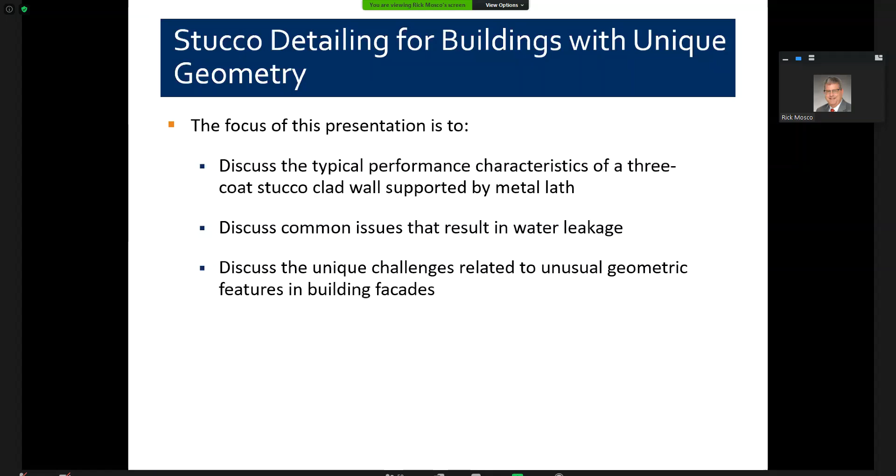And what we're going to be doing today is we're going to start with a focus on discussing typical performance characteristics of three-coat stucco-clad wall systems. We're going to talk about some of the common issues that result in water leakage, and Michelle's going to take you through most of that. And then in the end, I'm going to jump back in and talk a little bit about how unusual geometric features can affect the way a building performs from a water-resistant perspective. In the end, our goal is to provide you with an understanding of how these unusual geometric features can affect the behavior of water in the stucco system. And we want to be able to assist designers, builders, anyone who's involved in the construction, how to avoid these potential water intrusion problems due to inappropriate detailing.

So I'm going to turn this over to Michelle, and if you want to take over the screen here. Okay.

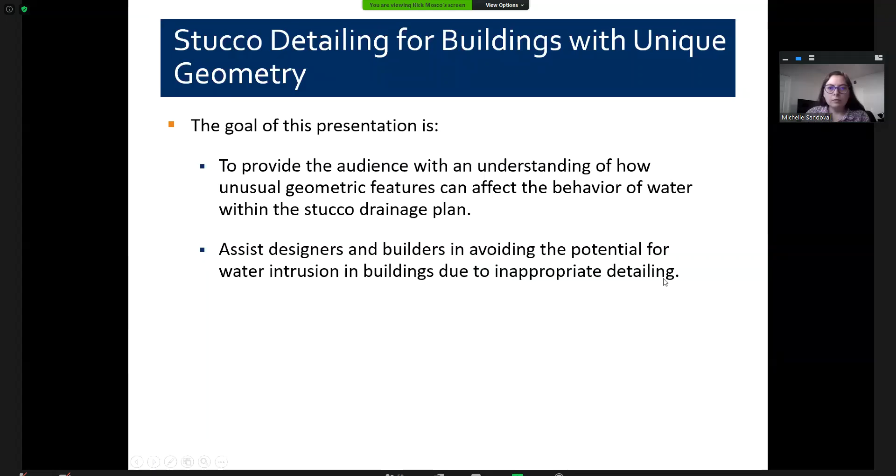So as Rick said, I just wanted to start off with a little bit of a precursor, brushing up on some stucco basics, talking about the different types of stucco cladding, such as the barrier system and drainage system.

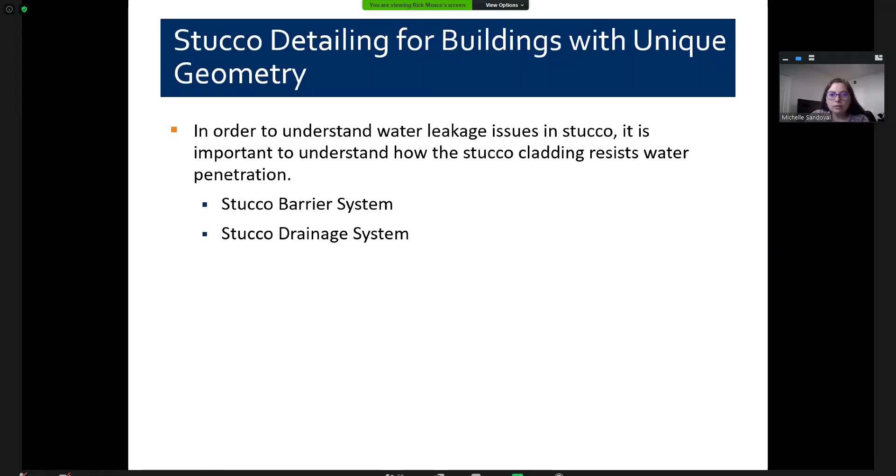So typically we know, so, oops. I don't know. Rick, are you moving slides? No, I'm not touching anything. Oh, okay. There we go.

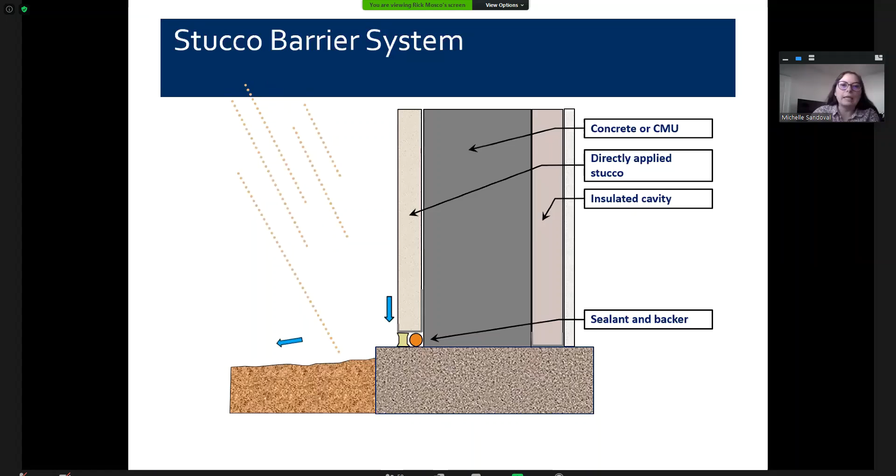Okay, so barrier system. Typically we've got that would be stucco directly applied to a CMU cast-in-place concrete wall. As you can see in the graphic indicated with the blue arrow, water is not penetrating the actual stucco assembly, since there's no actual drainage plane behind the stucco in that particular system. So generally for a directly bonded stucco system, we have either against CMU or concrete. The biggest difference is there's no weather barrier behind the stucco assembly. And it's pretty critical for the stucco to be actually fully bonded to the substrate, since that's what really allows it to perform as a barrier versus a drainage system.

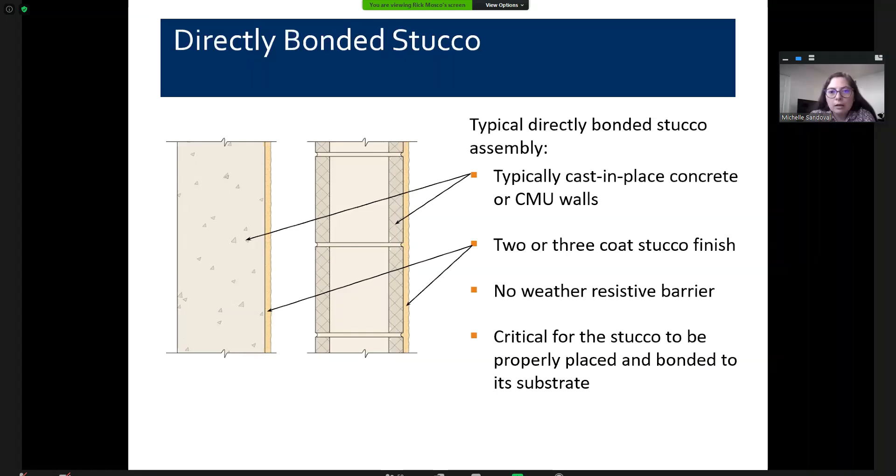And then a more common approach that we see is the drainage system, where we have a drainage plane behind the stucco assembly. This drainage plane will consist of a weather-resistive barrier and flashings, which allow water to evacuate that actual drainage plane. This graphic is just one particular profile that could work for that as far as a drainage medium, but there are different profiles that can work for that.

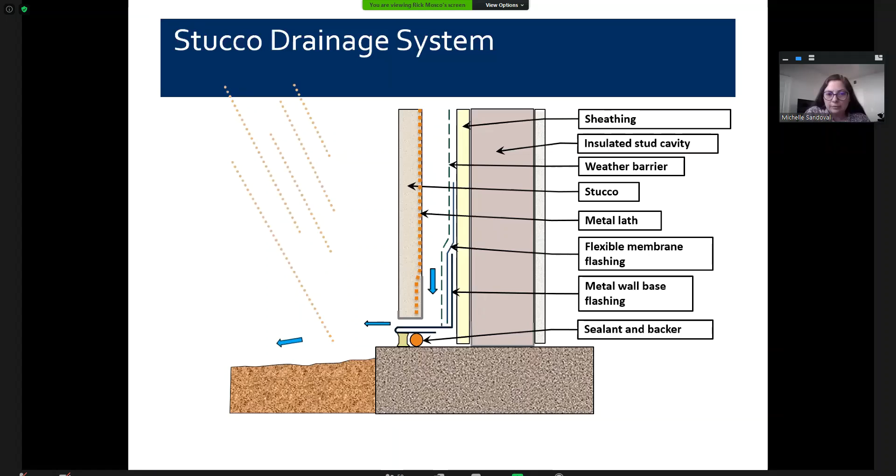As Rick mentioned, we generally know how water behaves when we have a drainage plane in stucco, and it's generally predictable what path it will take. This changes with buildings with unique geometry.

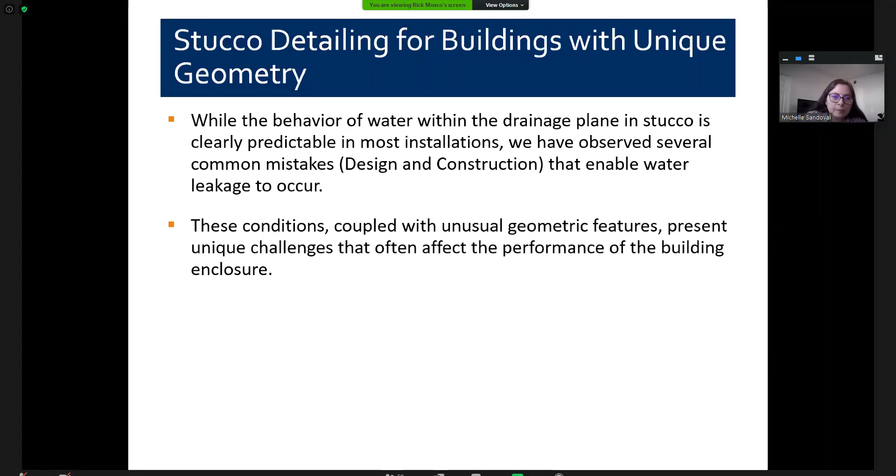Although water management can be generally predictable, we often see some common mistakes either in design and construction that do lead to water leakage. These, as Rick will get into later, can be further intensified with buildings with unique geometry.

So just a little bit of a precursor, a brush up on typical stucco components. Generally we either have 1, 2, or 3 coat stucco, ranging between 3/8 to 7/8 inch thickness. Most typical, we have a 3 coat stucco with 7/8 inch thick over a metal lath.

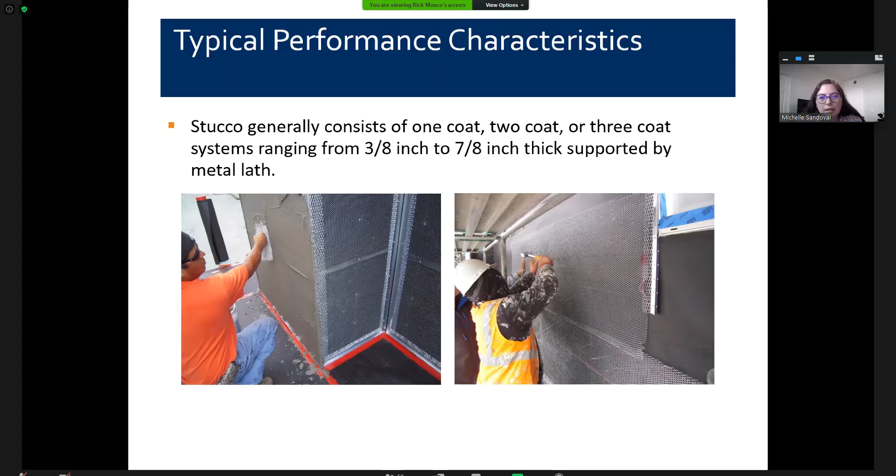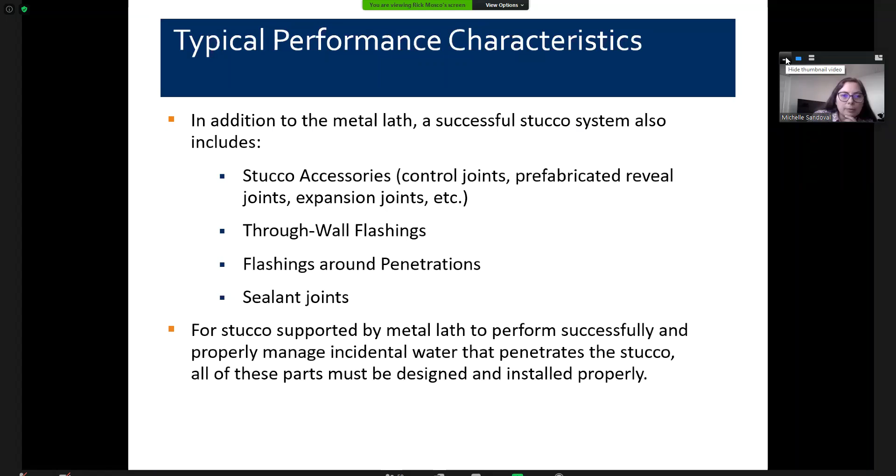In addition to a lath, there are also several other accessories for stucco, such as control joints, reveals, expansion joints, through-wall flashings, and other penetration flashings. We also have sealant joints that go around the perimeter. But in order for the stucco to really perform properly, all these components need to work together to actually have a proper water management system.

Unfortunately, all of these parts are not always properly designed or installed. From our past leakage investigations, we often see common issues with either poor installation of the weather barriers, failure to provide or install through-wall flashings properly, poor installation of metal lath and different accessories, as well as application of the stucco in a horizontal application.

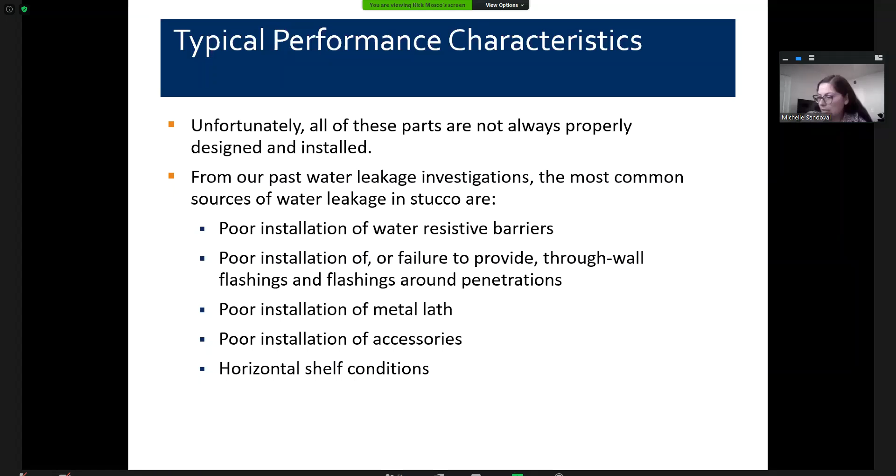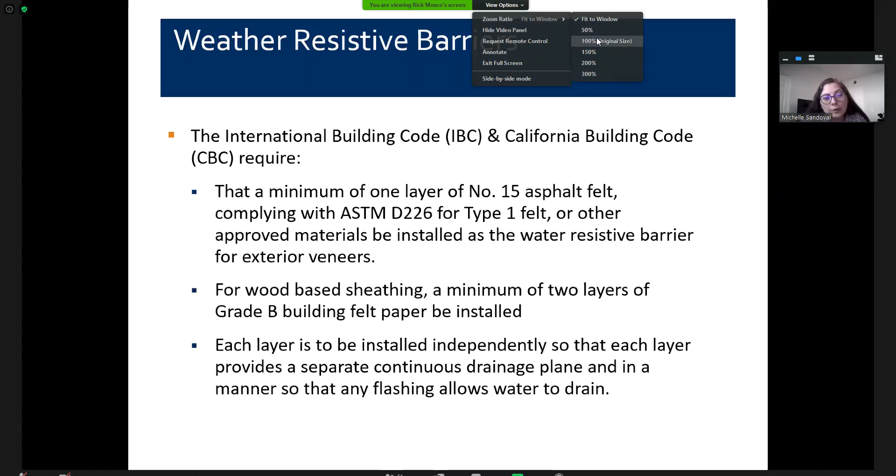So getting into a little bit of information from what the code actually requires. IBC and CBC both require just a minimum of 1 layer of number 15 asphalt felt for complying as the weather barrier. For wood-based sheathing, 2 layers are required, and each layer needs to be independently installed to allow for a drainage plane within each layer.

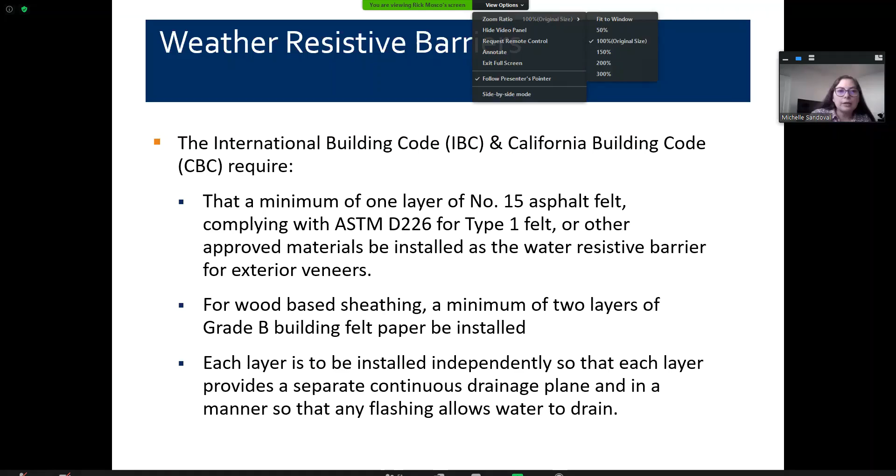As far as different types of weather barriers, there are definitely quite a wide range. There's loose laid sheets, self-adhered sheets. Loose laid can be felt, paper, building wraps, different types of actual sheet products. Then we have fluid applied membranes and adhered membranes.

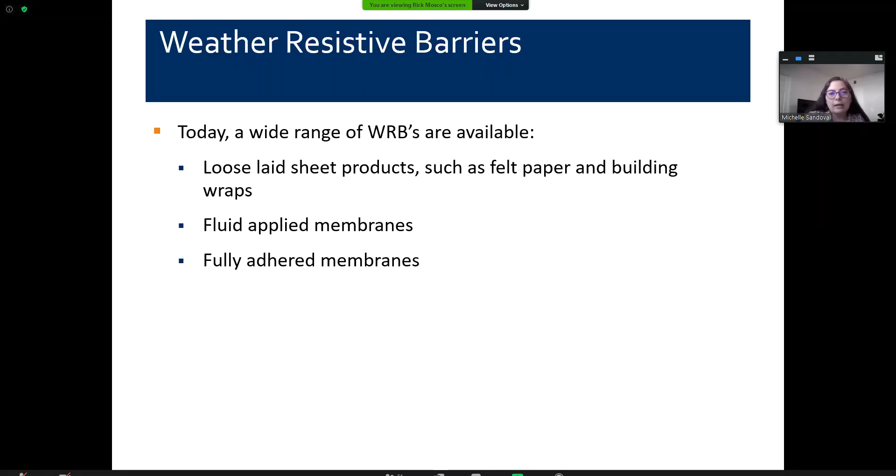From our experience, usually 1 layer of building paper is generally not adequate, particularly if there's compounding issues at flashing conditions that can allow that 1 layer to fully saturate, and then in turn saturate any sheathing or even framing behind that particular weather barrier.

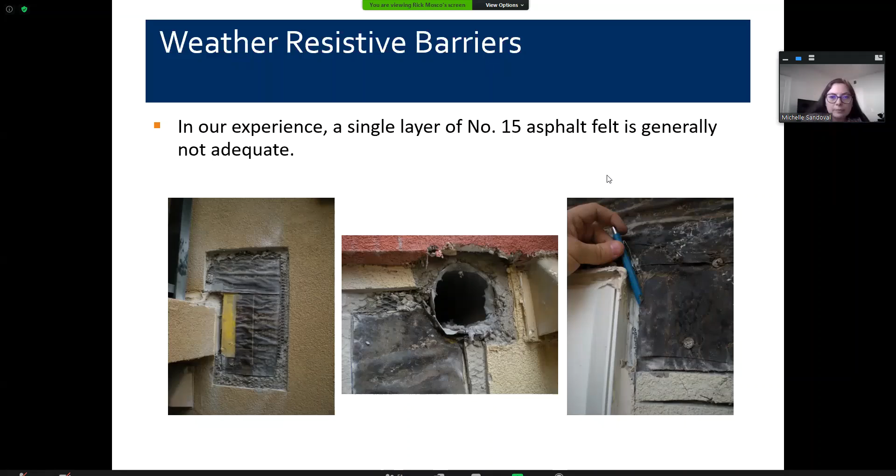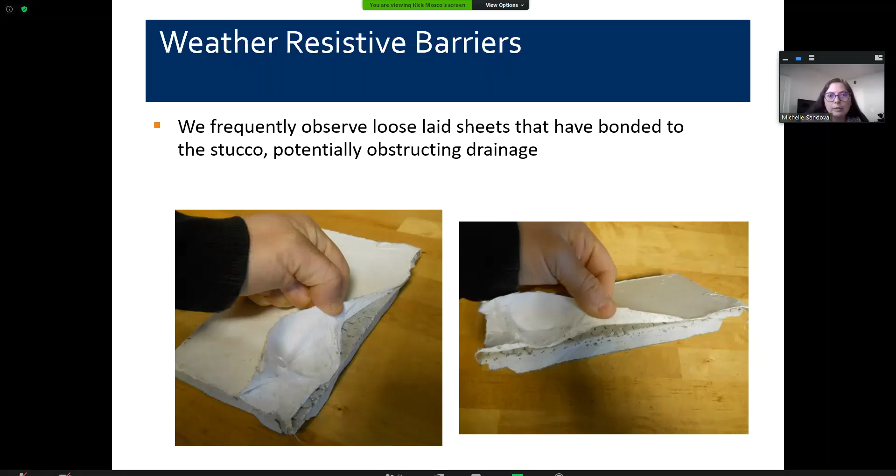We also have often seen some of the loose laid sheets that can bond to stucco if there is no sacrificial layer of building paper that might be used as a slip sheet between the loose laid sheet.

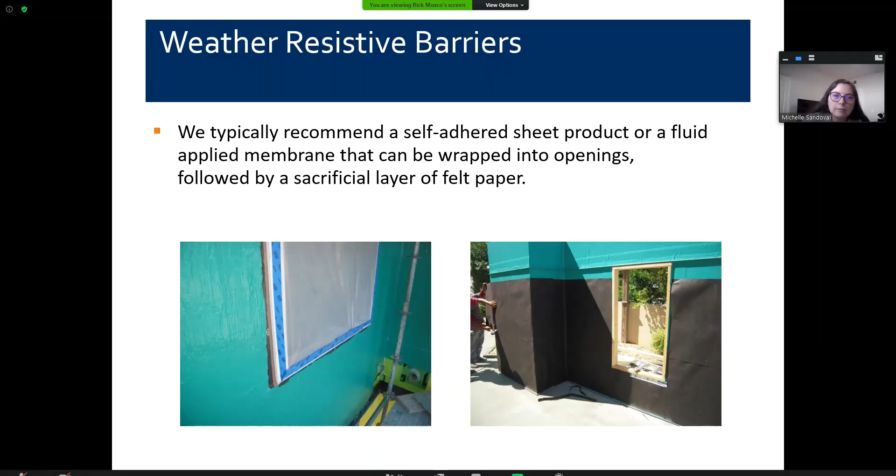So generally, we typically would recommend either a fluid applied or self-adhered sheet product that can be wrapped into openings, followed by essentially a sacrificial layer of building paper that can act as a slip sheet between the backside of the stucco and the fluid or self-adhered membrane.

So for flashings, again, IBC and CBC have similar requirements as far as the purpose of the flashing to allow for water to evacuate the drainage system. And essentially it also requires flashings around typical transitions such as different deck conditions and window assemblies.

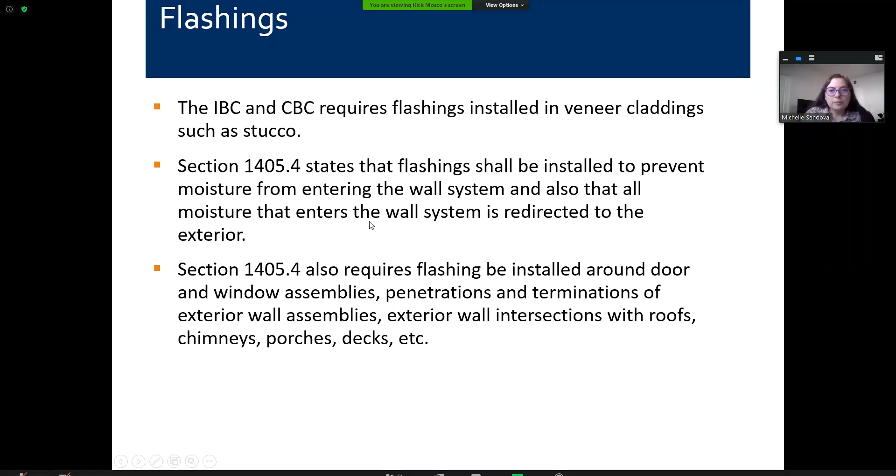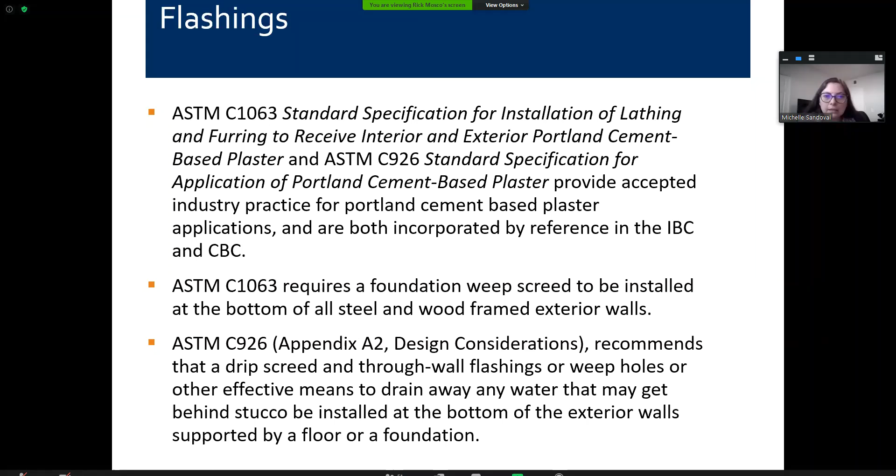As far as other standards that are pretty common industry practice for following stucco application, we have ASTM C1063 and ASTM C926, which both help with specifying standard practice for application of the lath and the plaster. ASTM C1063 has more specific language on what kind of flashing would be recommended for the base of the wall, as well as different through-wall flashing requirements that essentially help with the management of water and evacuate it from behind the drainage plane to the exterior.

I think there's a delay.

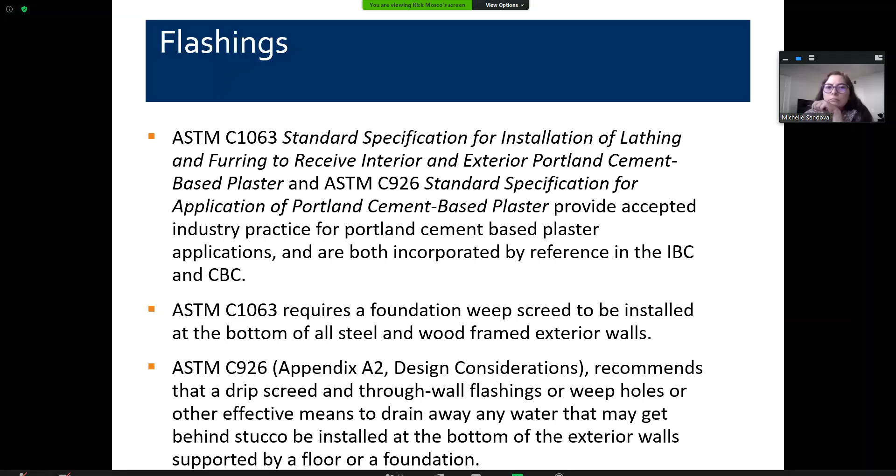Okay, so although we have language and standards and different code requirements for how these different flashing conditions should be either installed or incorporated with the stucco system, they're frequently either possibly detailed incorrectly or installed incorrectly, and oftentimes these flashings are just not incorporated in either the correct locations or in the correct sequencing.

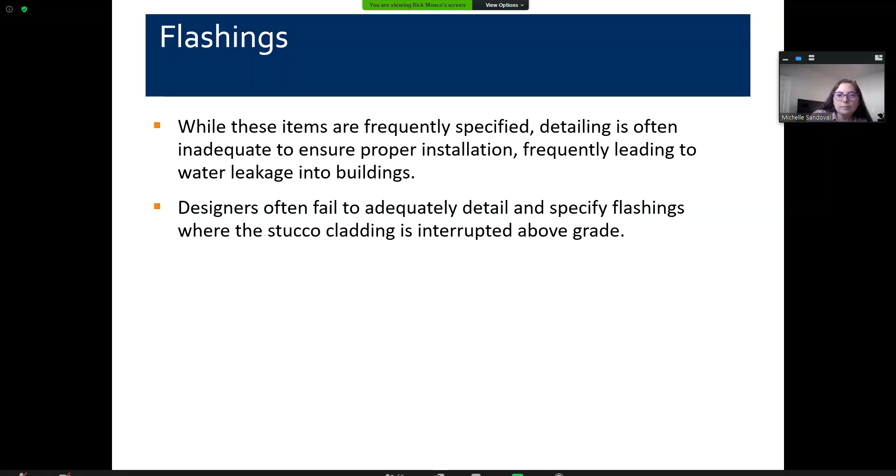Through our various investigations, we have seen the most common examples of issues are at areas at balcony transitions, window heads, and different penetrations such as pipes.

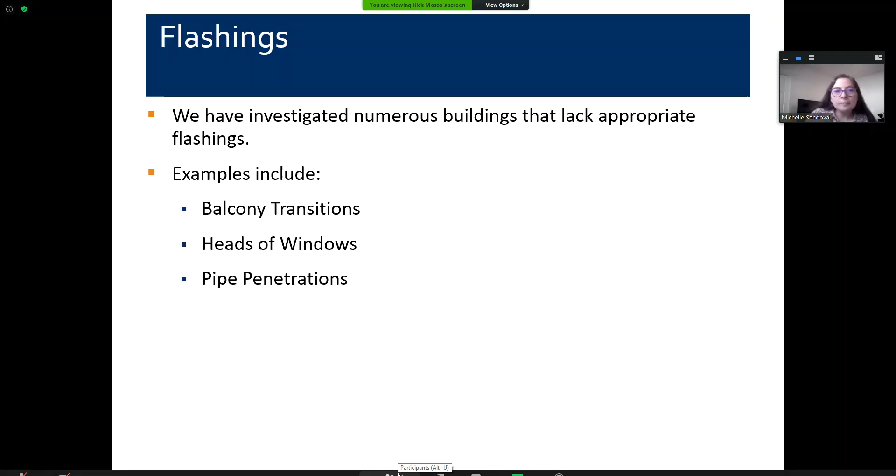Here we can see a typical balcony transition where no saddle flashing or other form of base of wall flashing was incorporated, which led to water being trapped in this area and saturating the building paper behind.

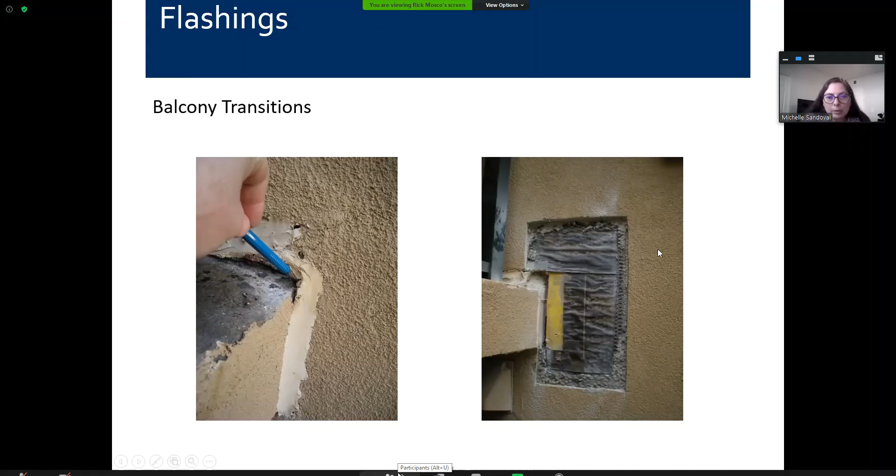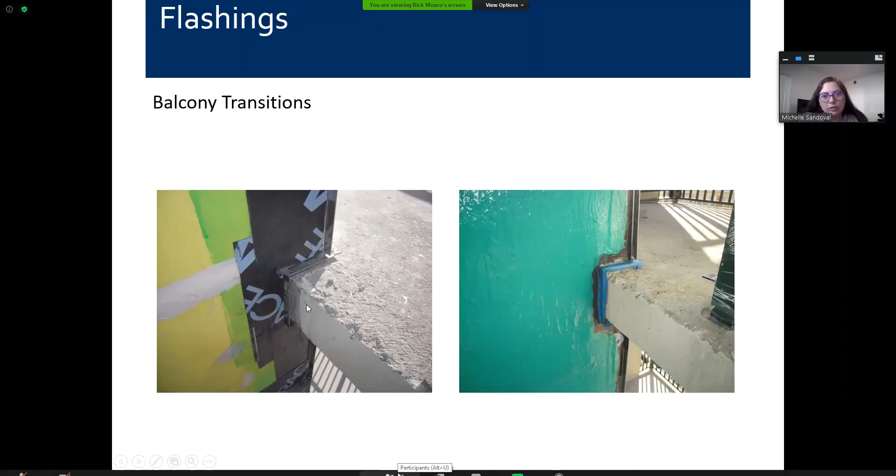A more appropriate detail for this type of condition would be including a saddle flashing that wraps around that edge and a self-adhered membrane that transitions with that flashing, as well as a weep screed and different casings that would finish the transition at that balcony edge and actually allow water to drain around that edge condition.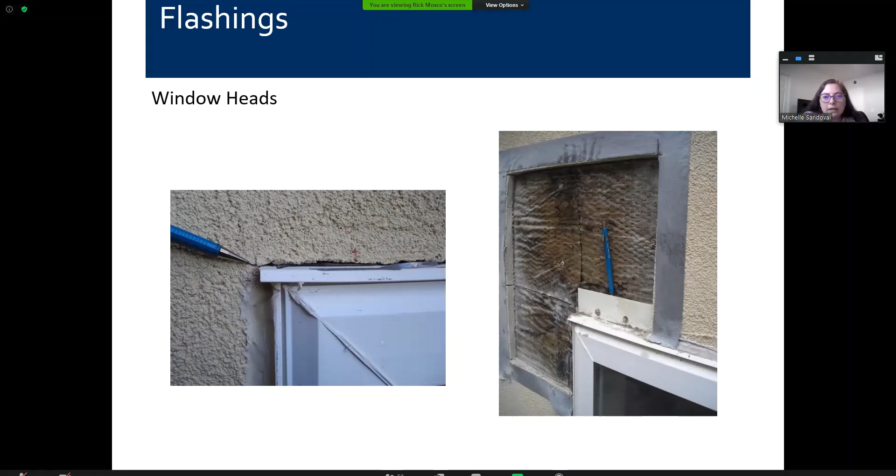This is just another similar condition where due to lack of any proper transition, water can get trapped, and once that happens, like we said, one layer of building paper is oftentimes not sufficient, and once that's saturated, it leads to water leakage to the interior.

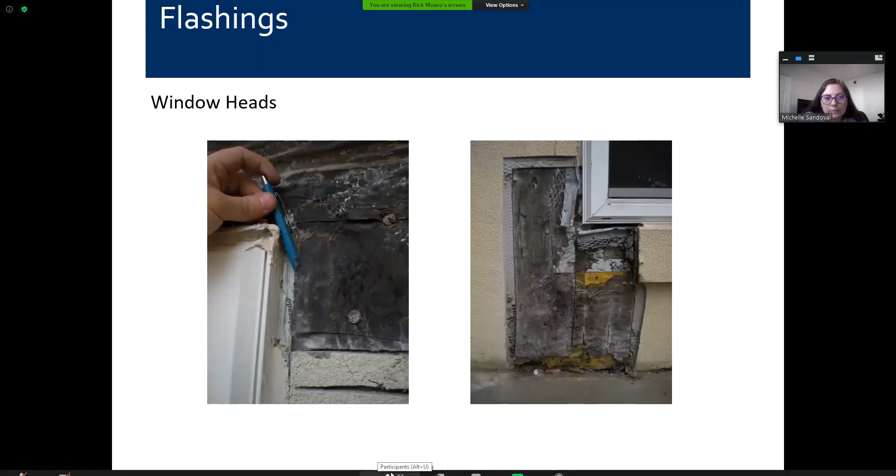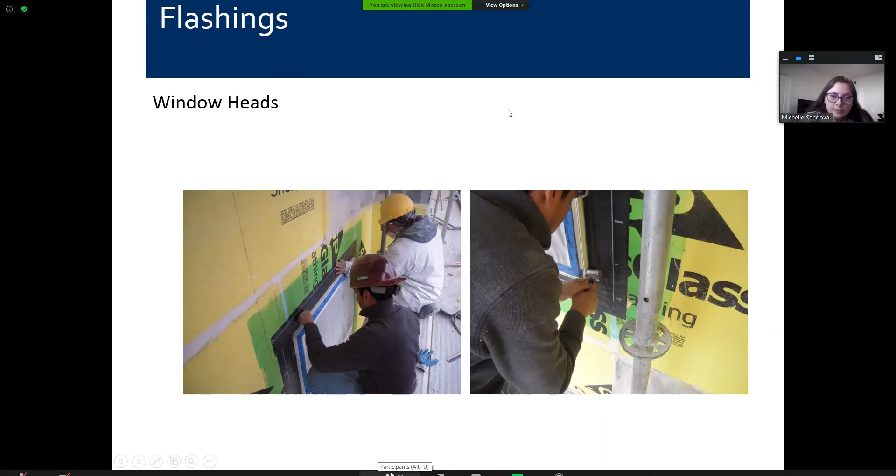Options for better detailing of those types of transitions include having a self-adhered membrane as part of the termination of that sheet metal window head drip flashing. This similar detailing could also be done for through-wall flashings at floor lines and different horizontal joint conditions.

Here as well, you have the window head flashing extending past the window head, which allows for evacuation of the vertical stucco assembly above that as well.

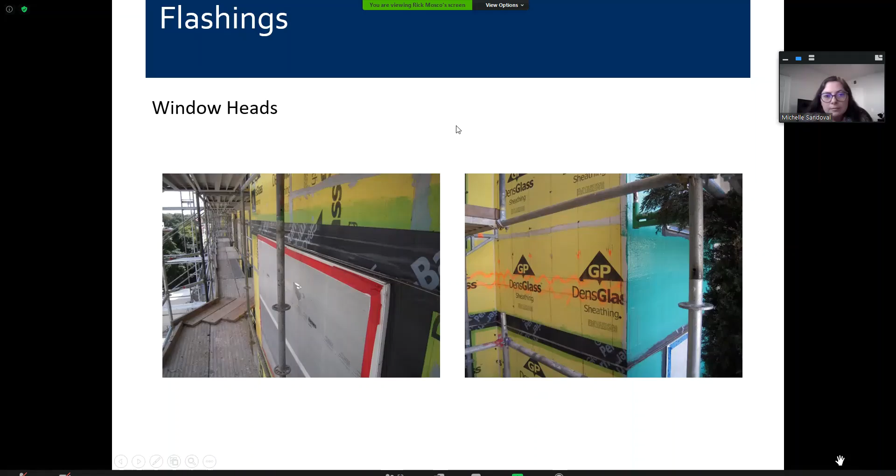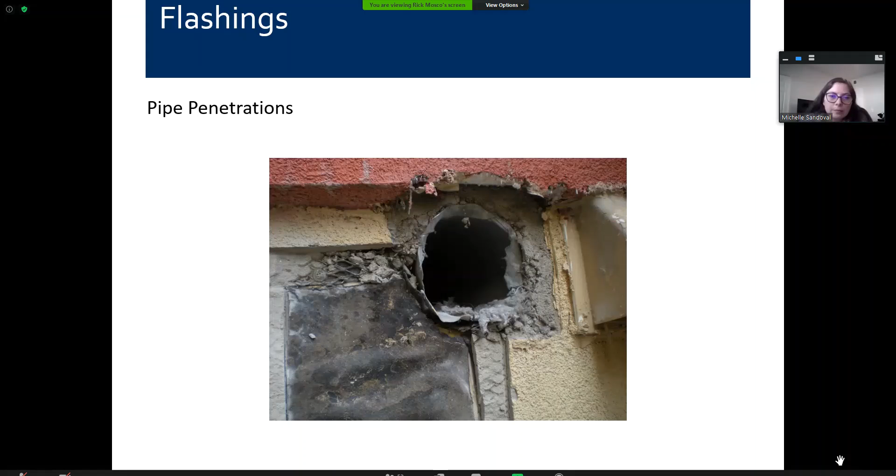Pipe penetrations are also often either not flashed properly, or possibly the gap between the pipe penetration and the cladding surround might rely on just an exterior sealant joint, which oftentimes will deteriorate over time and not perform.

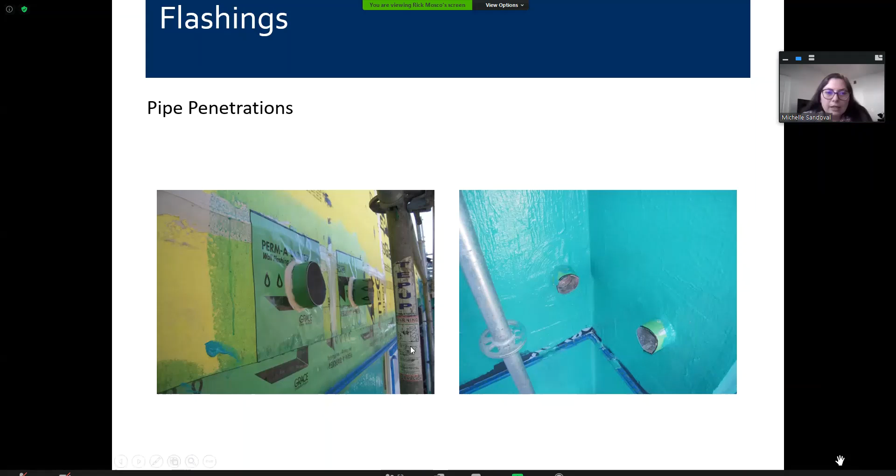A better approach to that type of detailing would be to include a self-adhered membrane around a target flashing around the actual pipe penetration, with a full fillet bead of sealant around the pipe penetration, which then gets integrated with a fluid-applied weather barrier for a pretty robust indication of full flashing around that pipe, eliminating any potential gaps that might occur from the pipe perimeter.

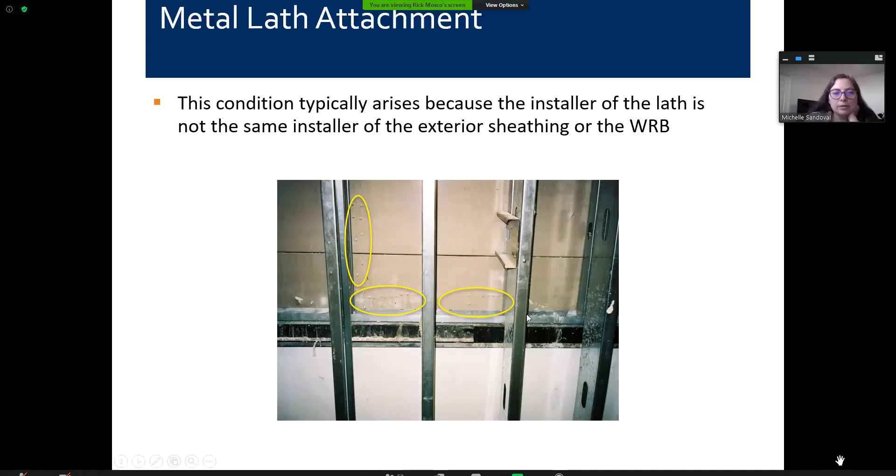Oftentimes we see another possible source for water leakage through fasteners for lath attachment. Although lath attachment is generally supposed to go into the framing members, we have found some instances where shiners, or fasteners that don't actually penetrate into framing members, are observed throughout the height of a whole stud, which can then lead to multiple unsealed penetrations through the weather barrier.

This could be avoided by having some form of coordination between the different subcontractors. Generally, whoever's installing the sheathing or the cladding may not be the same sub. Therefore, in order to have a way to document and mark out where the framing is located, any attachment is actually done back onto framing and not in the field of the membrane.

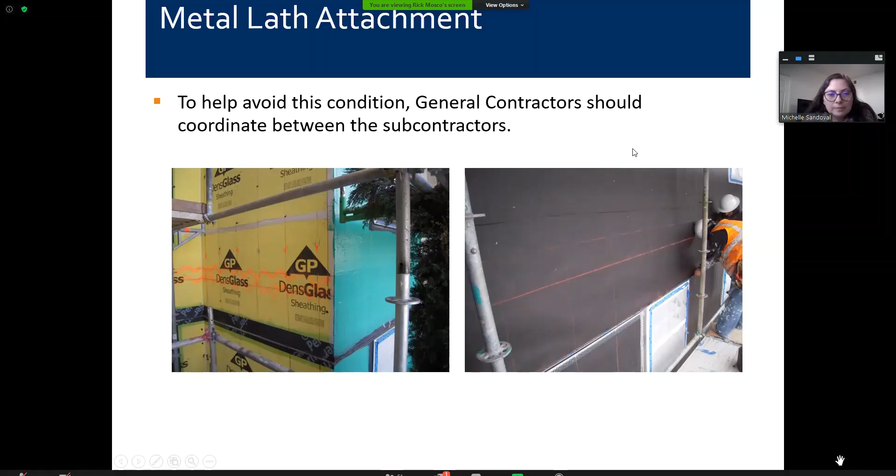So you can see here the lath following the red marked lines of where the framing is actually included, which avoids any kind of loose fasteners that might be offset from the actual framing.

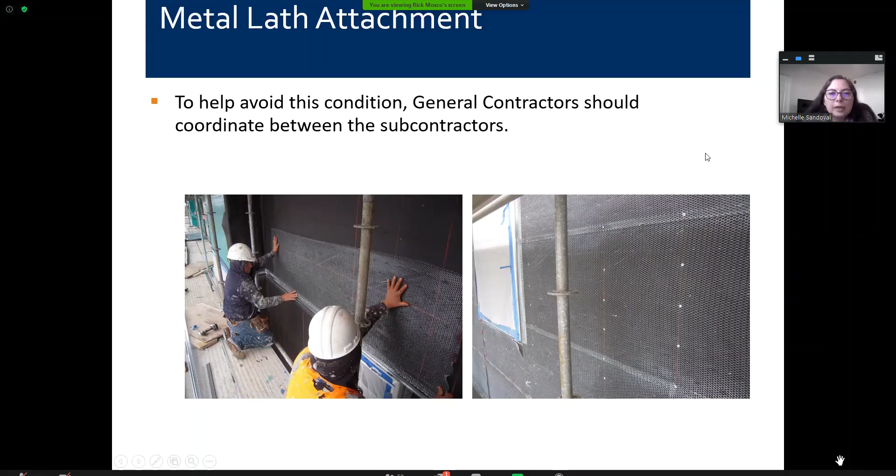Different accessories, most common are metal accessories, but we also see vinyl accessories as well. One of the most common accessories is control joints, which we typically recommend are wire tied, and then we have the screw fasteners for the actual lath.

So here you can see wire ties for a vertical control joint to the lath itself. This allows the control joint to actually move freely and not be restrained back to sheathing if it's screwed on.

Also, you can see here another important condition for control joints is to have the lath be discontinuous between the two sections of the control joint, to allow the two sections to actually move independently.

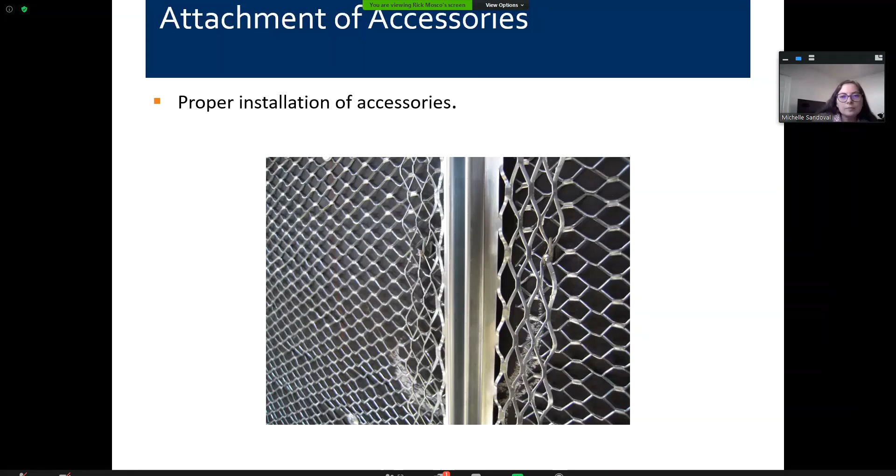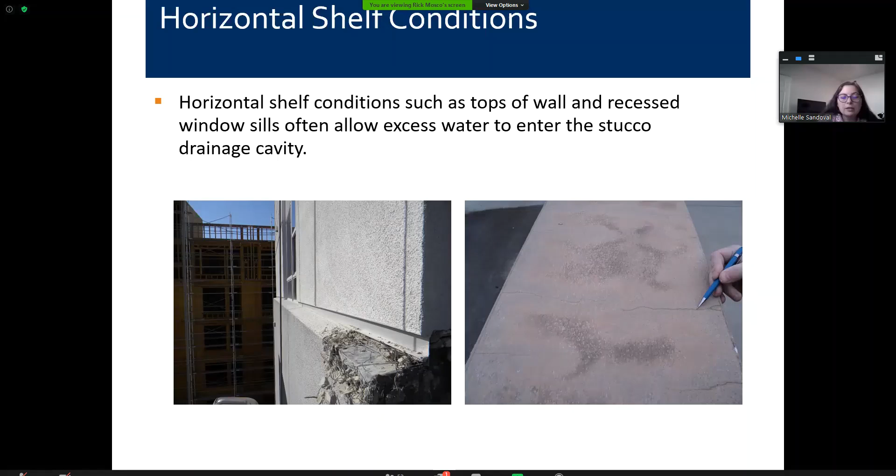One other item that we typically see that might lead to issues is application of stucco on a horizontal surface. We typically see these areas are either not sloped correctly, which can lead to standing water in these areas, and any cracks in these top horizontal surfaces can then lead to excessive water being put into that cavity.

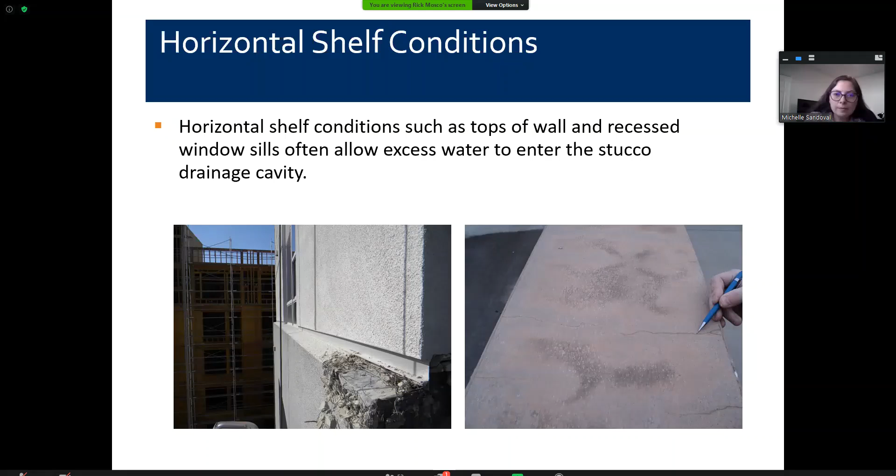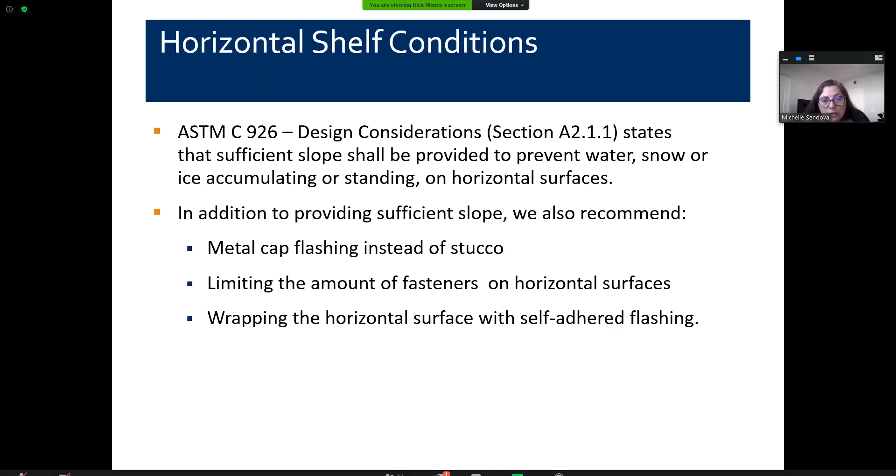Typically for any application of stucco on a horizontal surface, you want to include a sufficient slope. In Southern California, we don't have snow or ice accumulation to worry about, but certain regions might require more slope to allow snow to slope away from that condition. Obviously, if we have any areas with low slope, standing water could be an issue as well. So typically we would recommend either avoiding stucco in that kind of application, using a metal cap flashing instead of stucco, or if stucco is the route that will be used, it's best to limit any kind of fasteners on the horizontal surface, and always wrap a self-adhered membrane beneath the weather barrier for added protection on that horizontal surface.

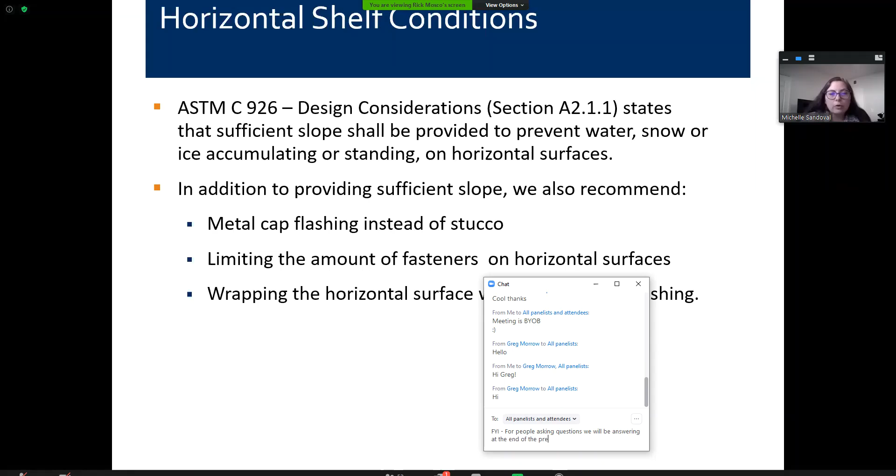And I will turn it over back to Rick.

See if that works. Okay, let's see, get my sharing. There we go, it looks like we got it. Thank you, Michelle, nice job.

Appreciate it. Now we're going to start talking about, I think, what probably interested a lot of you, and that's, first of all, what does it mean to have unique geometry, unusual geometry, and how does that affect the stucco?

So what we've got here is we're going to be talking about things like diagonal control joints, diagonal window heads, diagonal window sills, all kinds of things that are not commonly used in buildings.

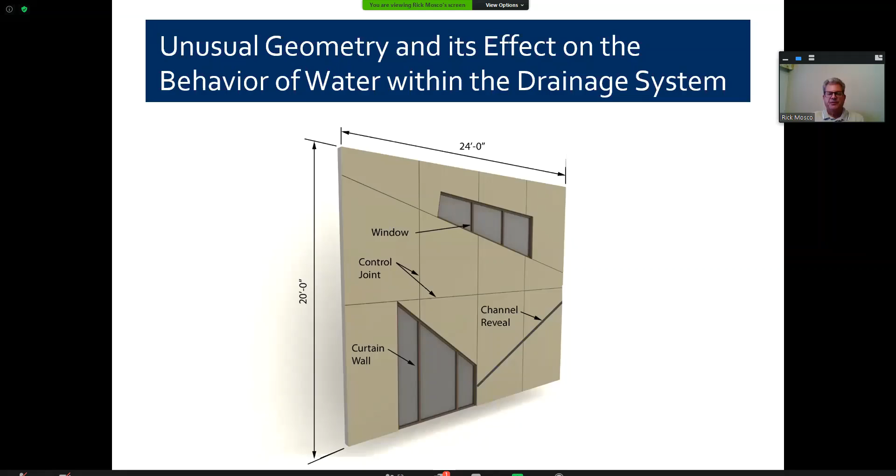The basis of this discussion is it was brought about by a litigation case I was involved in several years ago. We were retained by an attorney who was representing a stucco subcontractor who was being sued for construction defects. By the time I got involved, there had already been a report done by the plaintiff's attorneys and their experts, and pretty much the report said that our client made a lot of mistakes, and we had to agree that there were a lot of construction defects that certainly led to the problems.

But in reviewing it, I concluded that there were additional problems besides the construction defects, and I concluded that the design itself wasn't really appropriate because of the inclusion of these diagonal accessories and diagonal termination conditions.

The system on these buildings is a 3-coat plaster system over metal lath. There was a layer of building paper, one layer of a sheet polyolefin air barrier, and then gypsum sheathing and steel studs.

The water intrusion that we saw in the report that the plaintiffs prepared clearly showed the installation errors. They had done water testing. They had found leaks that replicated leaks that had been going on in the building before the litigation. And when they did the destructive testing, they were able to find these defects. But the report also highlighted a lot of areas that had leaks, but did not have observable defects in the installation. Based on reading that, I concluded that I thought there were some problems with the way the building was designed and how that was going to work with these diagonal accessories.

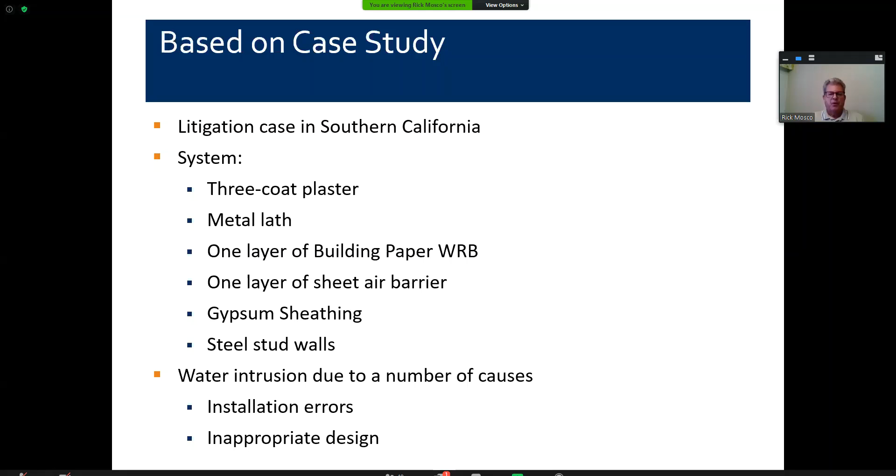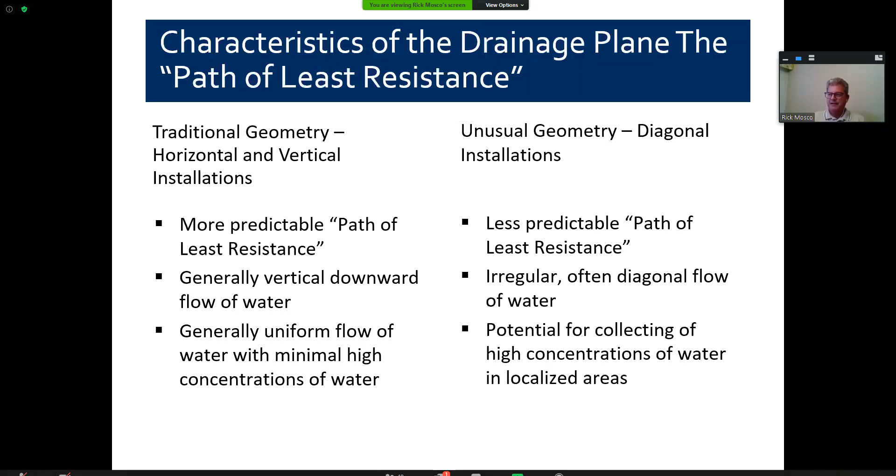So diagonal accessories behave differently than normal accessories. When you have traditional geometry, horizontal and vertical installations, you have a path of least resistance for the water that is more predictable. Generally it moves downward with the flow of water, and it's generally a uniform flow of water. You don't really have a lot of high concentrations of water. With the unique geometry, these diagonal accessories, the path of least resistance to the water is less predictable. It's irregular, it often flows diagonally along with the accessories, and it also leads to a potential for collecting water in high concentrations in localized areas.

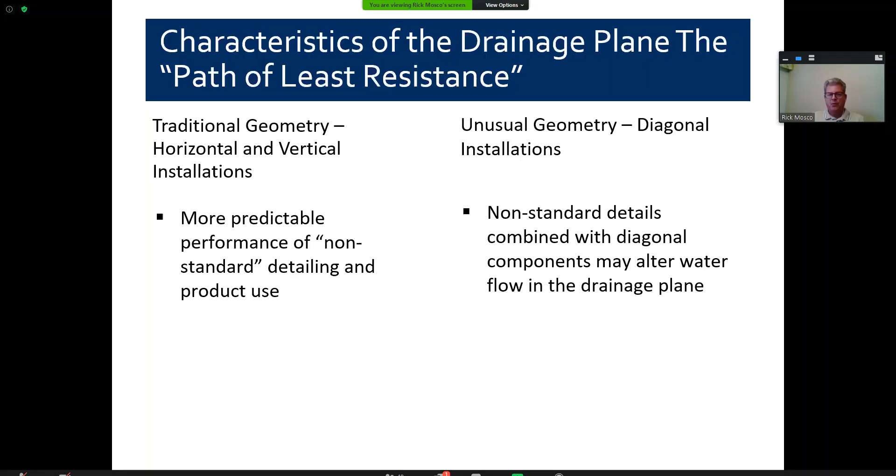The traditional geometry is also more predictable in the performance of non-standard detailing, and we'll talk about what that means in a couple of minutes. With the unusual geometry, the non-standard detailing made things a lot worse. They weren't that great to begin with, but they were made a lot worse. So after we were retained to work on this, and I had this theory that the diagonal accessories and diagonal terminations were contributing to the leaks, we decided to do some testing.

Now, unfortunately, I don't have any pictures to show you of the actual building. I can't show any pictures of the original report or pictures of the building because the owner is a government agency that had, shortly before this litigation, been the subject of several rather scathing reports of construction management problems. So they have never allowed us to have any photographs or access to any of the litigation information. But we were able to do some testing of our own.

One of the mock-ups was as designed. It was built the way the architect designed it, without any of the construction defects that our client had created. The second one was built according to design, but with the same construction defects that we found and that were found by the plaintiffs. Both these mock-ups were constructed.

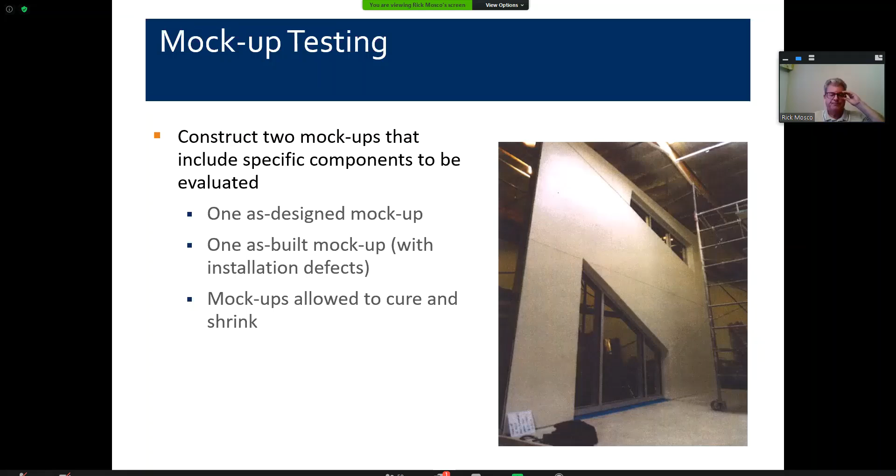The water testing was done in accordance with ASTM E2128, and that testing procedure allows us to use something many of you are probably familiar with: ASTM E1105, also called the spray rack test. So we had the spray rack assembled. Both mock-ups were provided with negative pressure, and we tested the as-built wall and the as-designed wall.

The intent of this was to allow for independent consideration of both construction defects and design issues. So, as expected, the mock-up with the construction defect leaked pretty quickly. We were able to document a lot of the same kind of leaks found in the original investigation. But we also found leaks in the as-designed building, built the way the design called for but without any construction defects, and those leaks occurred in similar locations as we had seen in the report from the original investigation.

The mock-ups also allowed us to evaluate some repair procedures. We wanted to consider whether it should be reclad as originally designed, or if we decided the original design was not adequate and we needed a new design for recladding, and then we wanted to consider the possibility of a barrier coating.

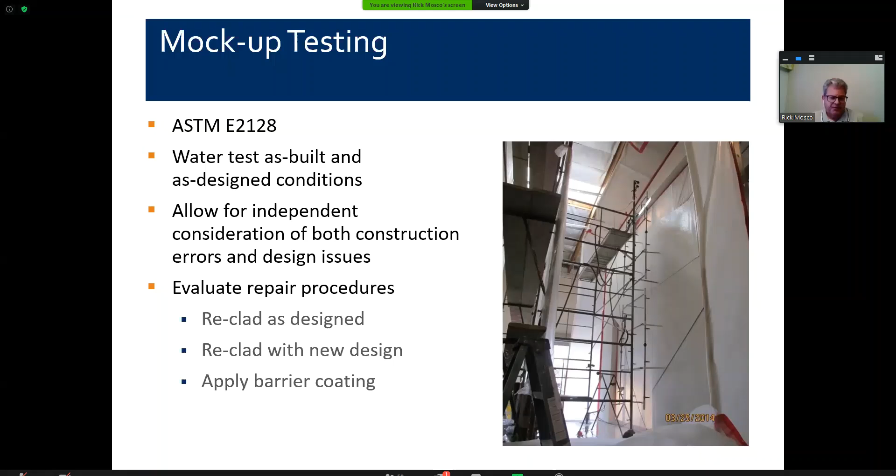So the mock-ups included several features: horizontal and vertical control joints, and diagonal control joints. As you can see, all these shapes in the mock-up were in the existing original building. What's different is the mock-up is only 24 feet long, while the building was very large. For example, this channel reveal is about 12 feet long here, but in the original building those channel reveals went 30 feet. So when we identified problems with these diagonal materials, those were exacerbated by the long spans.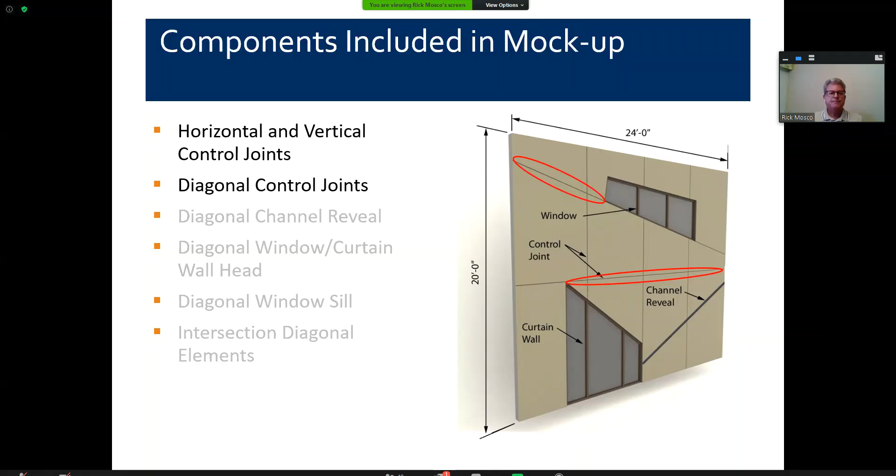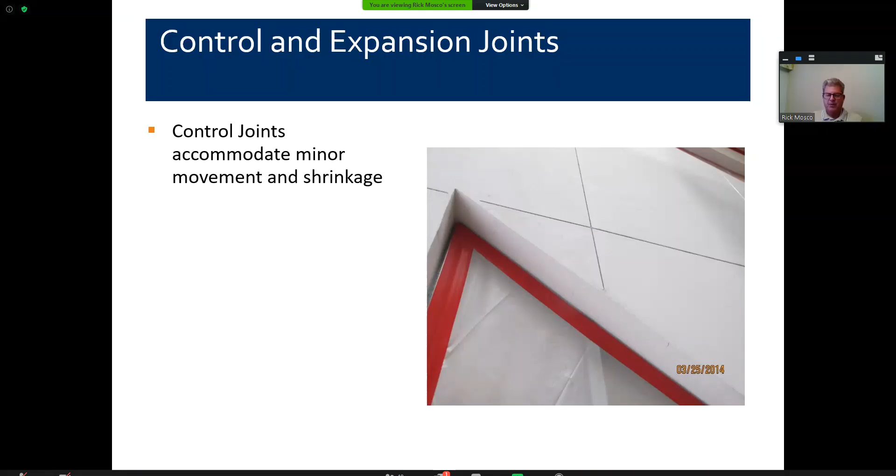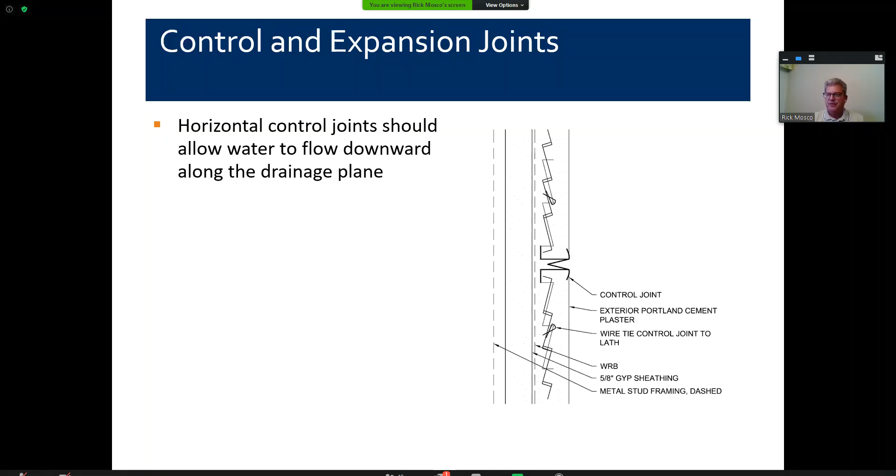So, as Michelle brought up before, the intent of control joints is usually to accommodate shrinkage cracking, but also any other minor movement. Again, we did allow the buildings to shrink a fair amount, probably not as much as they would if they were outside, but we got decent shrinkage. Then we take a look at the control joints and how they're installed. Control joints generally should be installed in accordance with ASTM C1063, as Michelle brought up before. The intent of a control joint, when installed, is to allow water to continue to flow.